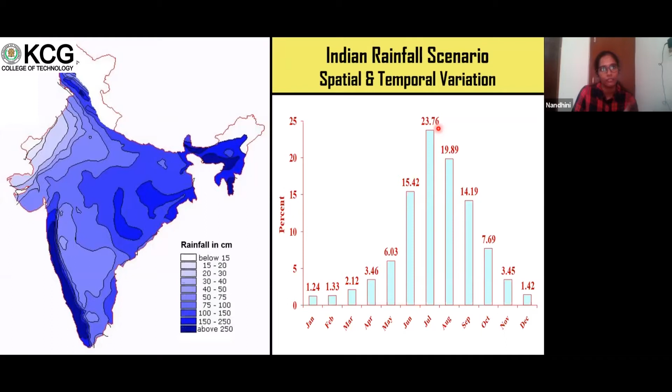In the case of time also, in January we receive about 1.24% of the rainfall. Suddenly in June and July we get 23% of the rainfall. So it's very uneven; one month we get more, another month we get very little. That is also an important reason why we are considering wastewater reclamation or other alternatives instead of rainfall.

So as I told, we have to be independent of rainfall. We should not be dependent on rainfall. For that we are trying to do wastewater reclamation, wastewater recycling and reuse. Before that, as ma'am told, India has STPs, sewage treatment plants, all around the country.

The wastewater we generate from toilets, kitchens, washing machines, everything gets collected. It is transported to a sewage treatment plant. There it is treated and then it should be reused or disposed. This should be the proper thing that happens, but this is not happening.

Whatever wastewater goes from our water closet to the sewer, only 12% is treated effectively. 26% is very unorganized and just gets disposed into seawater. The same in on-site sanitation facilities like septic tanks: they are very unsafely emptied and dumped in landfills or in the same ocean.

And there is open defecation also. So only 12% is actually effectively treated. This is a very important thing we have to consider before thinking about wastewater reclamation. So these are the problems we are facing. So what is the solution? The solution is wastewater reclamation, as I told.

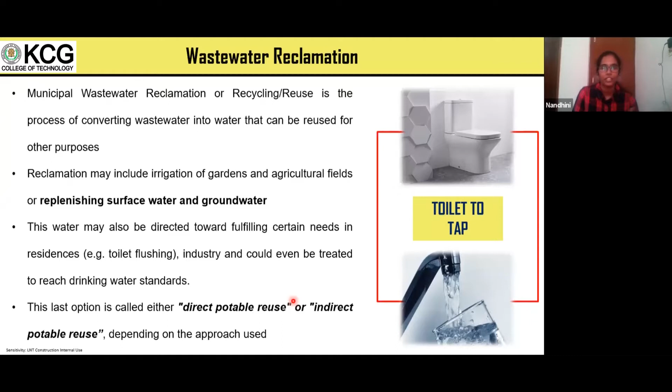They can even drink it directly. They will drink it, so I've added pictures of it in the last slides. That is called direct potable reuse. If we are using it for irrigation, putting it in an agricultural field, and then using the plants from that, that is indirect potable reuse. That is a different case. Two different cases are there.

So reuse versus recycling, we need to know what is reuse, what is recycling and all. So reduce, we often say, is like closing the taps, not using water when we are not requiring it. That is reduce. Then reuse is, for example, we have small RO plants in our home. From that RO, reject water will come. We can store it in a small bucket and use it for our own home garden, or for toilet flushing or something like that. Within our home we are using it, that is reuse.

Recycle is we are basically sending the wastewater to a treatment plant, treating it, getting properly treated water again, and then using it again for car washing, or even drinking. If we are treating it properly, we can even use it for drinking. So that is recycle. Reduce is very easy, but recycling is, that's why I've mentioned it as lowest risk and most preferable, highest risk and least preferable.

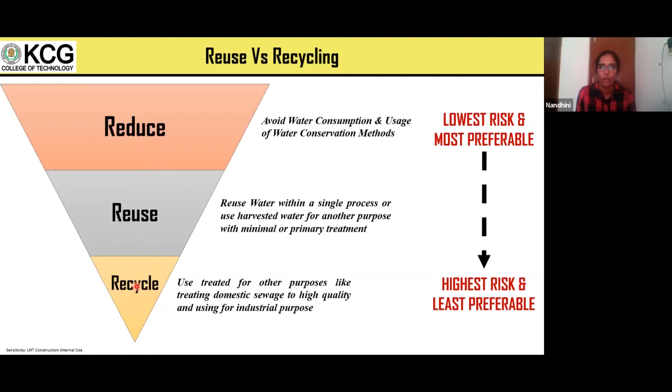So if we are reducing, we need not go for this, but unfortunately we are not doing it. A lot of us are wasting water. So recycle and reuse has become an obvious option for us. Next one. So I have told that it is very risky. Wastewater recycling is risky. Why am I saying risky? Because there are a lot of treatment units.

If we want good treated water from a sewage treatment plant, if we want to drink it or something, we need to put a lot of units for it. We need a primary treatment unit, a biological treatment unit, then we need to put a filter for it, then we have to disinfect it. Disinfect as in we should put UV treatment or ozonation. It's all very costly, very risky, very expensive. So that's why I put it as risky.

So here, this is a bit more technical: increasing technology requirement and decreasing resource recovery. I don't want to stress on this. If you're doing secondary treatment, that is biological treatment, activated sludge and all you would have learned from your environmental engineering basics, then we can use it for irrigation. Then tertiary treatment means we are filtering, with activated carbon filters and all. Then we can use it for urban reuse, as in car washing, vehicle washing, toilet flushing as I said.

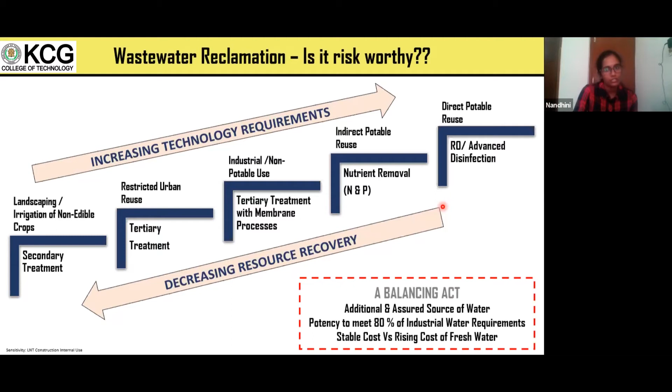Then tertiary treatment with membrane process, that is very important. For example, we have ultrafiltration, nanofiltration membranes and all, which give you very good quality water. That can be used for industrial purposes. Then we have nutrient removal, nitrogen and phosphorus. If you are removing that, then it is indirect potable reuse. It's very technical, but I just want to emphasize that investing in wastewater recycling or reclaiming is very, very risky, but we have to take the risk because it's important for us. We don't have an option now.

So what shall be done? This is a bit easier one. For wastewater, we have a lot of standards, Indian standards, US EPA standards, globally available. If BOD should be 5 mg per liter, then BOD should be 5 mg per liter. We can't relax it. We should restrict it to 5 mg per liter, then only we can use it for toilet flushing. We can't simply run an activated sludge process and then go for toilet flushing. No, that can't be done. We should treat it till it comes to that particular standard. So that is one thing, compliance to standards.

Next, I have to cite an example. We have an STP in Delhi. L&T is owning an STP in Delhi, a sewage treatment plant. It is 318 MLD, million liters per day.

So only 100 million liters per day is required by a nearby industry. So what they have done is, only for that 100 million liters per day, they have put advanced treatment. Others are normal treatment. So in that way, only for that 100 MLD, they are giving it to an industry and they are getting money from the industry.

The industry will pay you actually if you are giving water for them. So like that, they are earning money also. So we need not put it for 318 MLD. Only for that 100 MLD we can put it, and then we can get returns from it.

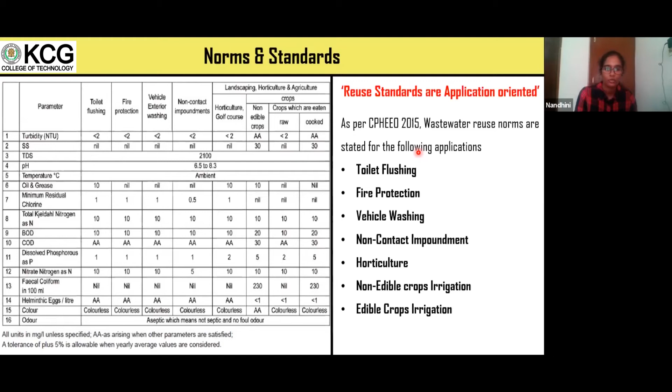For every particular thing, like for landscaping, for agriculture, for edible crops, it should be like this. For non-edible crops, it should be like this. So they have complete reuse standards. This is basically the basic standard which everybody follows. In case you want to learn more about it, you should check this.

So next one is, these are all specific for agricultural, how it should be the location, everything. These are all very, very technical. I really want to skip this because I think it would be more technical and you'll get bored. So these, if you want to know about it, please ping me. I'll surely let you know about all this.

These are all basically agricultural. In agricultural application, what are the norms and standards? Health and safety of workers should be checked. We have to do deep ploughing before, because if the sewage has BOD, in order to counteract it, we should do deep ploughing so that oxygen will come out and BOD will get nullified. So that and all is there.

In industry, as I said, cooling water, surface water discharge standards should be carried out. It should be like less than, residual chlorine should be 1 mg per liter. So things like that are there. So I'm just skipping this.

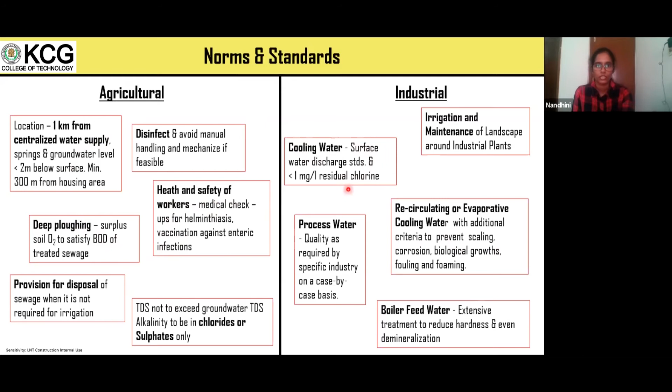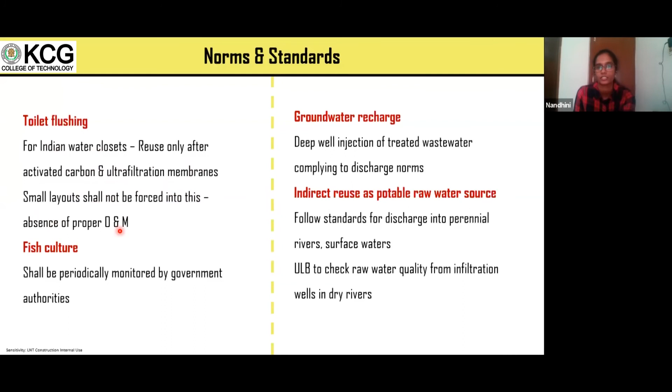Okay, this I have to explain. In construction activities, you might think sewage treatment plant is not related to civil engineering, structural. There are a few stigmas in that also, but it's not like that. In L&T also, they are using a lot of treated water for preparing concrete, curing, everything, for most of the construction purposes, because we have labor camps. There are thousands, 2000s and 3000s of laborers who are staying at the sites. The sewage that comes out from that should be reused.

For that, reuse is done through construction activities. This is in IS 456 only. From that only we have taken. So these are the criteria. For organic, it should be 200 mg per liter. For inorganic, it should be 3000 mg per liter.

If the treated water is under this limit, then we can use it for mixing, curing, and all. And pH value should not be less than 6, because if pH is more it will cause erosion and all. It shouldn't be acidic, it shouldn't be basic, it should be more or less in the 6 to 7 range.

And for curing also, we can use it, but we have to be very prompt in that. There shouldn't be any tannic acid, iron compounds and all in curing, so that and all we should take care. But if this particular limit is satisfied, then you can use it.

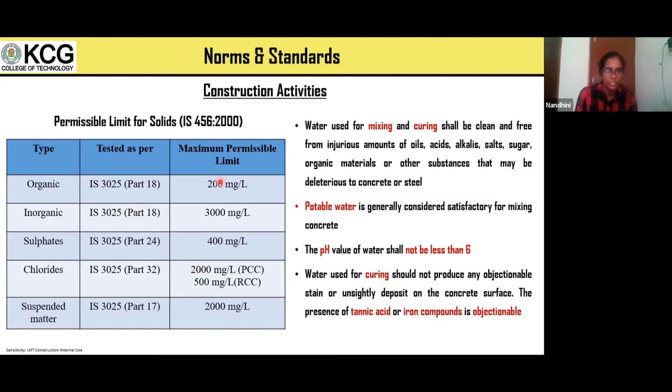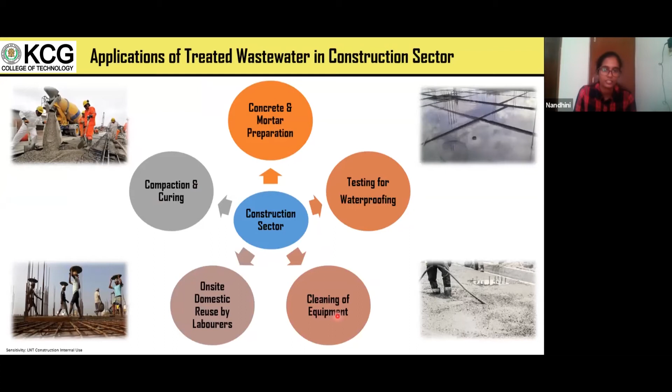So next one is, coming back to the technologies, we know like secondary treatment, tertiary treatment, we have primary treatment. It's basically settling that everybody will do.

In all STPs, they will do primary treatment. In secondary treatment, there are new technologies, not only activated sludge process. We have sequential batch reactor, membrane reactor, moving bed batch reactor, sequential batch biofilm reactor, and there are also modular units called Johkasou. So there are many treatment technologies available in secondary treatment.

In tertiary treatment, we have a lot of membranes like reverse osmosis membrane, microfiltration, NF, UF, ozonation, and disinfection. Disinfection, till now, most of the STPs only do chlorine disinfection.

If you're using chlorine, it's fine, but we can't drink it back. And with chlorine, sometimes there is something called monochloramines, dichloramines. I think you would have heard about it. It's very harmful, it causes cancer, in fact.

So in that case, if we are reusing for potability, we have to check UV disinfection, ozonation and all. But the point here is we can do everything, but it's very expensive. That also we should see.

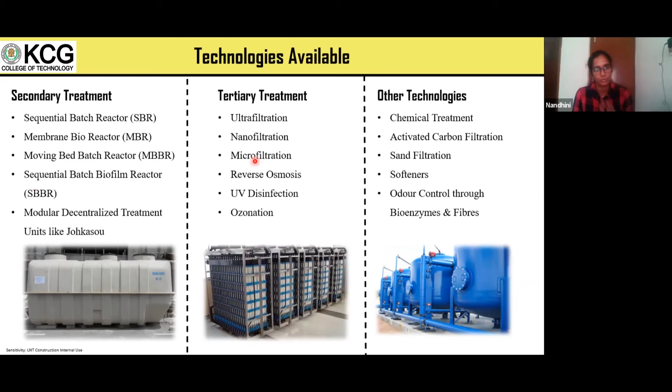Other technologies include activated carbon filtration, softening agents, sand filtration and all. These are all technologies available for wastewater reclamation. Treating it using these technologies and reusing it is possible. So that's what I want to imply here.

So that is the technical part of it. Now I'm going to run through a few case studies. I've got 3 case studies. One is, as ma'am has told, Vandana ma'am, she told about Singapore. So this is more of technical stuff.

This is just a schema. In Singapore, like how we have CPHEO, as I told, they have the Public Utility Board. They are the sole owners of all the treatment plants in Singapore, so they only run it. So what they do is they have a public utility board, they are responsible for it, and what they do is they treat wastewater.

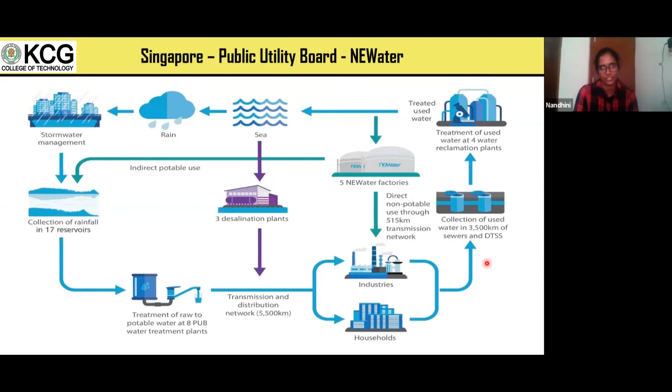They treat it to such good levels that they even drink it. The water that comes from the tap of a Singapore home, from the tap, they can even take it and drink it, and it comes from a sewage treatment plant. We can't even believe what they are saying, but they are doing it. So this is one of the classic examples that's happening right near us, in a country which is very near to us. One of my bosses went and saw it, and he couldn't believe himself, he was very astonished by it.

But I'm pretty sure this is a long-term goal for India, but still it's a very good inspiration for us. So these are a few statistics about how Singapore has developed. Singapore is forerunning in the field of wastewater treatment. NEWater is the brand name. The water that comes from the STP is called NEWater. It is the brand name given to reclaimed water, which is potable and consumed by humans, produced by Singapore's Public Utility Board. It is treated sewage that has been purified using dual membrane technologies - microfiltration, reverse osmosis, and ultraviolet - in addition to the conventional water treatment processes.

So let me explain this, it's pretty easy to understand. Let's say we have houses, industries and all, water is coming out, there is a water reclamation plant where it just gets treated normally, as we all treat, using activated sludge process or some sewage sequencing batch reactor or something. Then it comes to a NEWater treatment plant. What they do is there is a microfiltration membrane, then a reverse osmosis membrane, and then ultraviolet disinfection. These three steps happen and then we get high quality NEWater.

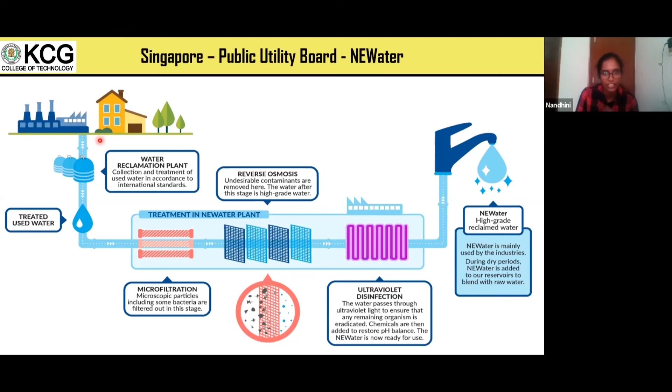This is mainly used in industries, but still there are few instances where they sell it also, especially the Public Utility Board has an exhibition center where they completely use this NEWater only. So we are using - this is what I told - toilet to tap. This is from our toilet, but we are using it back. So this is something we have to learn from them.

Next one is happening near in Bangalore. This Bangalore Kempegowda International Airport, it's a 2 MLD capacity plant. They have used extended aeration in it.

I hope everybody knows what extended aeration is. It's a type of biological treatment system. So generally what they do is screening, grit chamber, aeration tank, clarifier, disinfect it, and then put it into some river or ocean.

That's what we normally do. But what they have done here is before the chlorine contact tank and after the clarifier, they have put two filters, a dual media filter and an activated carbon filter, and then disinfected it. So this is used in landscaping. As mentioned previously, they are using it for landscaping in the airport area. Airport does have a lot of land, they need landscaping, they need water for it, so they are using it.

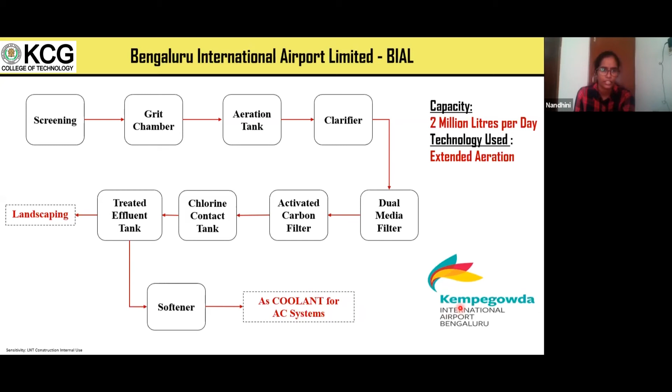Moreover, some part of the effluent is taken to a softener system and used as a coolant for the ACs in the airport itself. So that is also done. This is one classic example which is happening in Bangalore. So this I wanted to bring to your information.

The treated water is completely used. I have seen it myself, I see it daily. All the toilets, they are using this treated water only for flushing. For landscaping also they are using it. The problem is there is a bit of smell to it, but of course we are reusing it. There should be some shortcomings in this, but we have to accept it and take it forward.

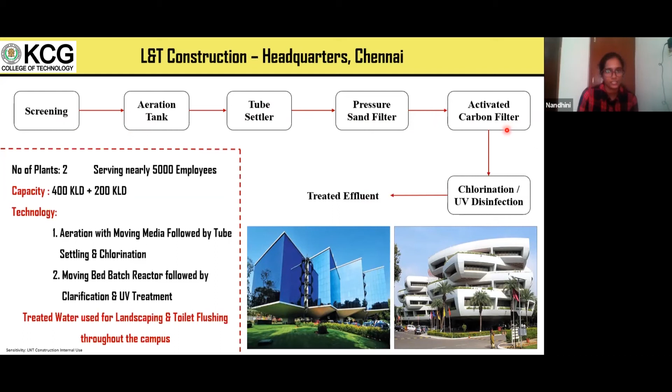Okay, finally I want to say what are the saliencies in wastewater reclamation. So basically we are not depending on rainfall, that is something very important. We are reusing whatever we are generating, so in that way we are less dependent on rainfall.

Number two, we need not go for desalination. Desalination is very, very high-end expensive stuff, and the reject management is a headache there. So in that case we need not go for desalination, just recycle it. Just put one filtration membrane and then recycle the whole thing for irrigation. Just think, instead of using river water for irrigation, we are using wastewater. Then how much river water can we actually save? Just think about it, I'm just giving you a small idea.

Then the viability of STPs will increase, because there will be a lot of STPs. I have got some statistics that there are a lot of STPs that are not working at all in India. They have built it, but they have not worked on it.

So then groundwater recharge through reclaimed water for indirect potable reuse. Groundwater recharge also we can do, so that groundwater levels will increase. And then there's potential nutrient source - the treated water will have amounts of nutrients, nitrogen and phosphorus, we can also use it for irrigation. Then, as I told, less dependence on rainfall. So these are the main advantages of doing wastewater reclamation.

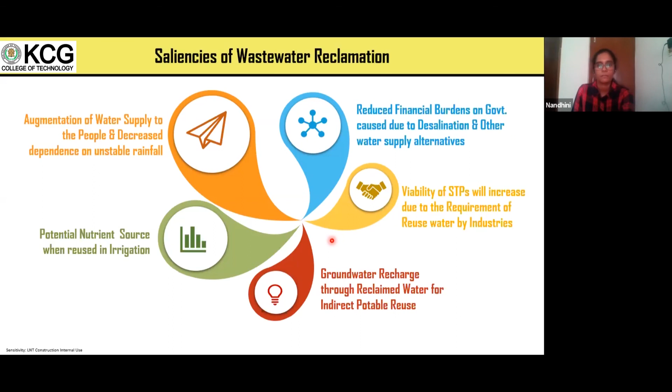So these are all very good for the nation, very good for the society, very good for our future generations also. So I think if you want to take up environmental engineering, or you want to do a final year project on environmental engineering, you should consider all this, and you have to come up with good ideas. So that's what I want to say. Thank you, in case you have any questions.

Yeah, I have a question. Yeah ma'am. So how about the economics, the financial thing involved in this, per liter?

For generally an STP, general power generation and all, without power generation, for an MLD we need somewhere around 60 to 80 lakhs.

For with power generation, with ultrafiltration membranes, I think somewhere it goes around 1.2 crores for an MLD. Okay. That's all. Wonderful presentation. Thank you. Thank you.

Yes, Nandhini, I'm having one question. Yeah, ma'am, please. Actually, you have done a lot of projects. I just want to know our Indian mentality, people's mentality to accept this process. How do you come across these issues? Ma'am, as of now, we have given water to only industries. So industry, basically they'll understand. They just need the characteristics of water. If it's within their limitation, they'll take it.

But we have never gone to people yet. So we don't know. That's what I'm mentioning. There's a lot of stigma. Even we have an STP nearby our home, and we are going to protest against it. Everyone will do it. Yes. So in that case, we can't. It's a distant dream for us, like using it for potable water, as drinking water and all.